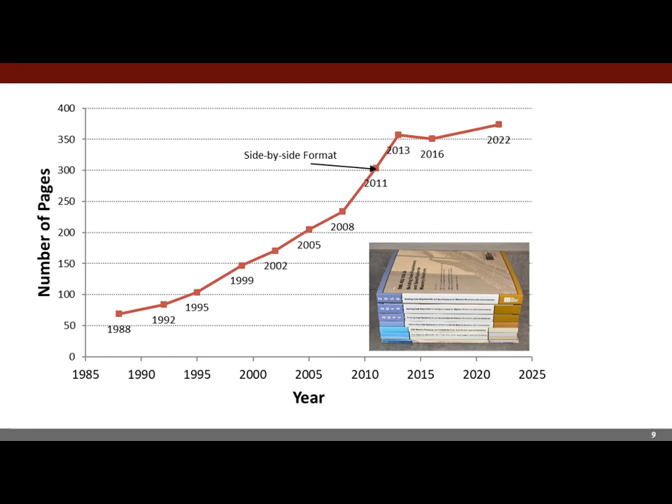I know you really haven't adopted the 2022, but there are some things that we can actually apply now, so we'll look at that and what's coming. We did, unfortunately, increase pages a little bit, but at least the slope's pretty small there, not too bad.

3 things to know, and you've sort of covered 2 of them already. So I'll talk about tension and compression controlled sections and strength design. I forget how many years ago, but I did a talk comparing strength design and allowable stress. I'll admit it, I'm a strength design sort of fan for a variety of reasons.

The veneer chapter is completely rewritten, so I'm going to talk very little about that. Next week, Tina Subasic is here to talk about the veneer chapter. There are some things that will interest architects, changes in the veneer chapter, and things that will interest engineers. I'll just touch on it briefly, but Tina will cover that much better than I could next week.

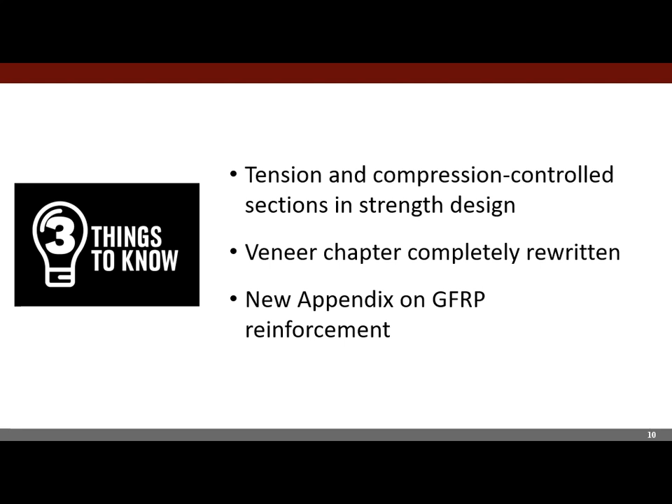And then we also had an appendix on GFRP, glass fiber reinforced polymer reinforcement. I know, was it October sometime, John Myers talked on that, so I won't really do much on that there. But those are some of the big changes here.

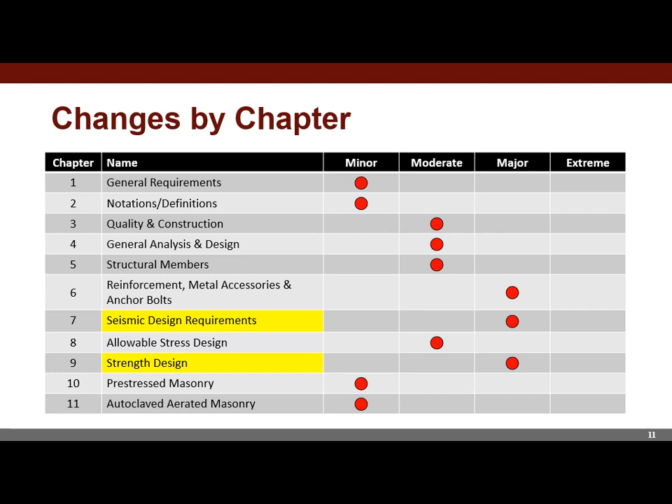Here's sort of changes by chapter, so I'm going to focus on the major changes that we have and highlight a few of those. We'll look at some related to reinforcement, some seismic design things, and a big one in strength design here.

The veneer chapter was completely rewritten. Empirical masonry was deleted, that's Appendix A. We moved the masonry infill out of an appendix, and then we added the appendix on glass fiber reinforced polymer reinforcement.

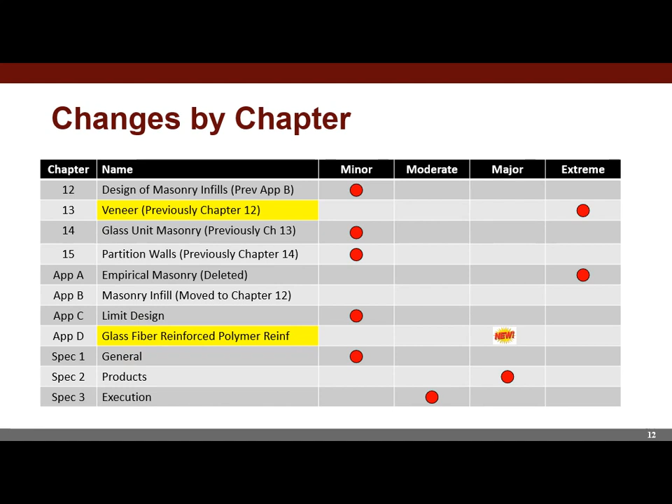So that's a big picture overview of some of the major changes in 2022. I'll just pick some out as we go along, and I'm actually happy to start with this one in Chapter 4.

Chapter 4 is general analysis and design, and we added in this table and figure on shear area. I really want you to hear the background on this: the Masonry Society gets questions from engineers, and then they parse the questions out to various people. I get a lot of the ones related to codes.

There were a couple questions where practicing engineers were just confused over shear area. It really wasn't defined very well, what they use for beams and stuff. So I said, well, if there's confusion, we need to figure this out. A picture's worth 1,000 words, so I developed this and worked with a couple of the structural engineers that sent in questions, got some review and feedback, and modified a few things. This is what we ended up with.

That hopefully clarifies some things there. I'll talk a little about the table, but the big point I want to make is I'm a strange person, I enjoy code, so give me your questions. If you're confused on things, ask questions. We will work to try to answer them. Maybe not until the next edition since it takes time, but do let us know your questions, things that are confusing. At least some of us on the code committee really want to work on that. So this is the result of questions and a review by several practicing engineers.

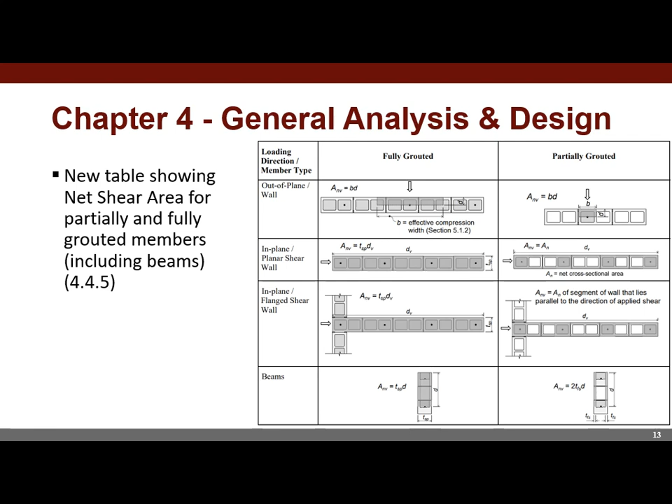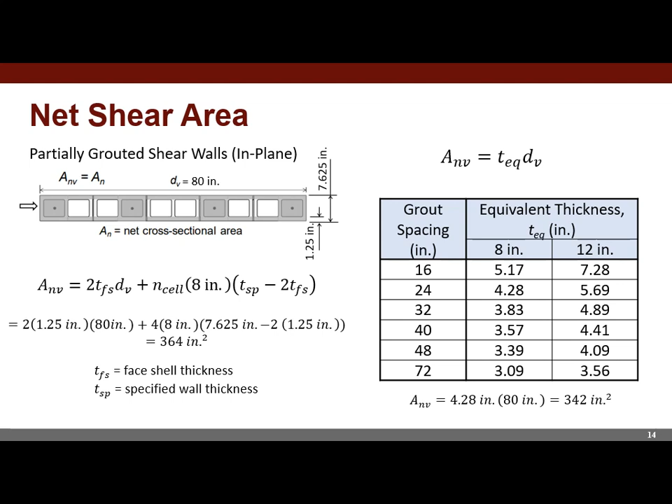Hopefully it's helpful. A couple things to point out: the net shear area. There's confusion on this. For a partially grouted wall, the in-plane area is the net mortar area, so usually just face shell bedding plus the area of the grouted cells, the darker gray area shown. So the face shell and the grouted cells. You can actually calculate it directly, or you can work off an equivalent thickness based on how much grouting you have to get the shear area. So we tried to clarify that.

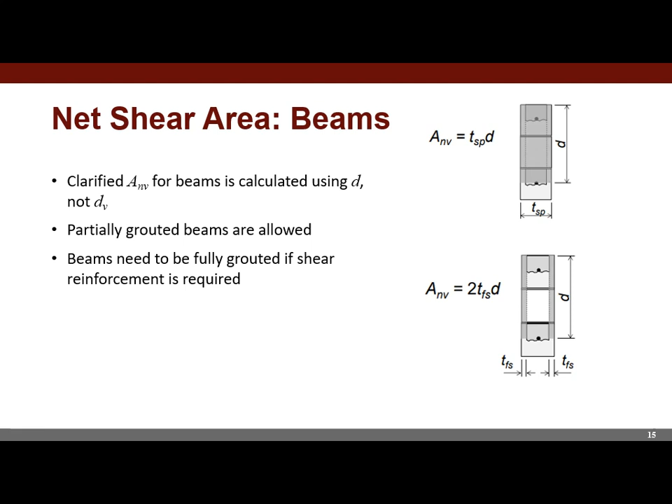Then the big one was the shear area for beams. Although we use the full length of the shear wall to get the shear area, for beams, as with concrete, we go to D, the depth of the reinforcement. We had some discussion about partially grouted beams, and we do allow that now. For the top and bottom course, this is probably not the best picture — if you're grouting the top and bottom course, you'd probably just fully grout it. But for a deeper beam, maybe you just grout a bond beam right over the opening and another bond beam a couple courses up, and the shear area we're taking conservatively is just the face shell area there. So we have a table for that.

Moving to Chapter 6, which is reinforcement: deformed bar size consistency, the size of reinforcement in grout, and then hooks. We'll focus on the first two, and there were a few other things, but we'll focus on the bold items we have there.

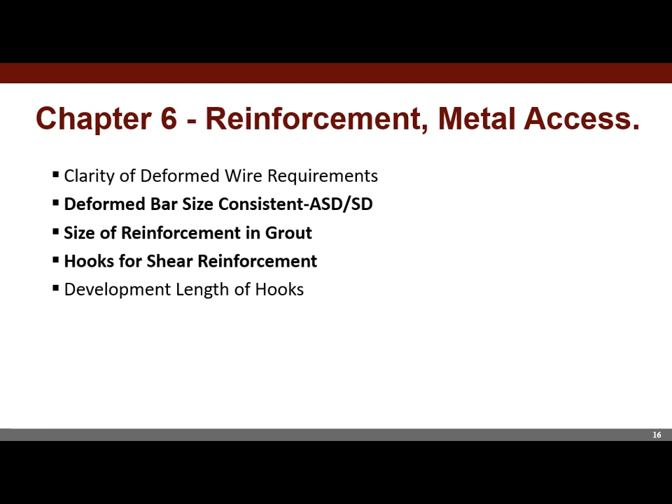Remember, masonry has allowable stress design and strength design, and there were differences in the prescriptive reinforcement provisions between ASD and SD — like 6% for ASD and 4% for strength, but measuring different areas, which was just sort of goofy. So we harmonized those into four requirements. It used to be a maximum bar size of number 9 in strength and number 11 in ASD. Now it's number 11 — that's rare, really rare. Usually we're at 4s, 5s, and 6s, but perhaps for a column or something.

We had harmonized this in 2016 too, so the maximum bar size is 1/8 the nominal wall thickness — so for an 8-inch wall, the maximum you can put in is a number 8, which is still pretty heavy reinforcing. We had some other goofy requirements, so now we have two criteria: it has to be 1/3 the least dimension of the gross grout space, or 4% of the gross grout space is the maximum reinforcing.

Now, what is the gross grout space? Sort of a strange name, huh?

And people have made some funny jokes about it, but we'll let that go.

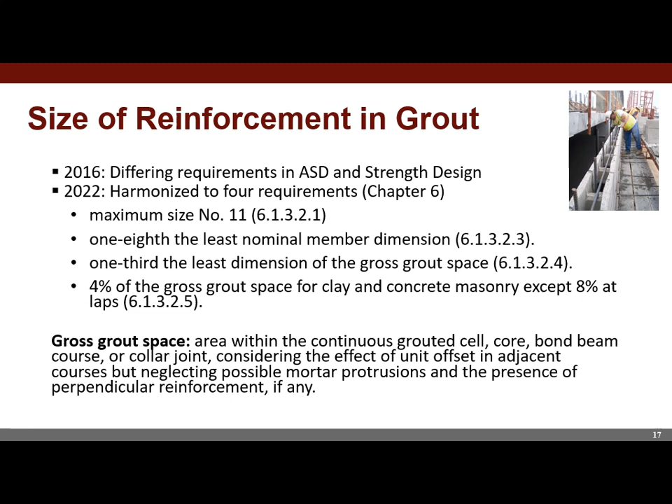So the gross grout space, you read the definition, and I somewhat facetiously say this is amazing code language, because it does actually say what it needs to say, and you can't understand it. So what is it? We have a picture for you in the commentary. The gross grout space is if you stand on top of the wall and look straight down, it's the clear space you can see as you look down into a cell. It accounts for the offset of running bond and the units, but it's what you see when you look straight down, the clear space there. We're not considering protrusions or horizontal bars, just the area you have when you look down.

So it depends a little bit on the unit type, whether you have running bond or not. Personal opinion, we may have dialed it a little tight, but it is what it is.

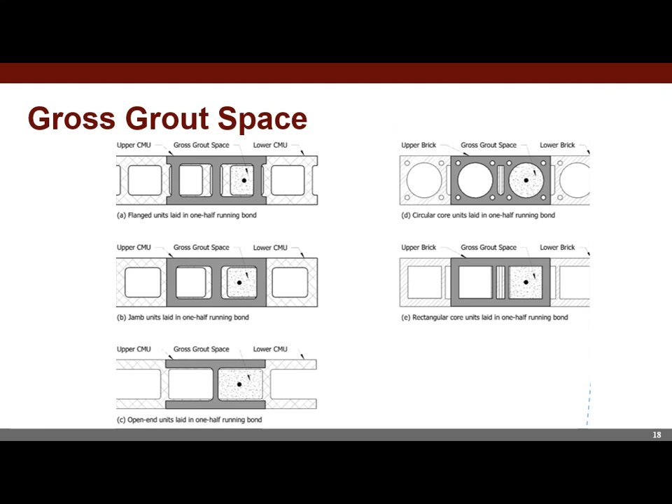Now the next thing tells you what it is, and then we have these tables here in the commentary. Just the fun of code writing—7 numbers there, 7 levels of numbering to get to the table. But this works out for standard units.

So out of all these tables, we'll just focus on one number here: flanged units, that's the flange unit you have up there. Actually, we don't use those in Knoxville. I'm not sure about here, but we'll just take flange units, that's the most conservative. 8-inch wall, here's the number to focus on.

So we meet those gross grout space requirements with a number 7 bar, that's the maximum—again, probably more than we usually use—or 2 number 5s. So I can put that in my cell and I've met those gross grout space requirements.

If you need bigger, which is rare, you could then specify jamb units and have that as part of your specifications. But really the number I would focus on is this one right here. I'm just saying 8-inch; you can look at other thicknesses, but that is really the limit.

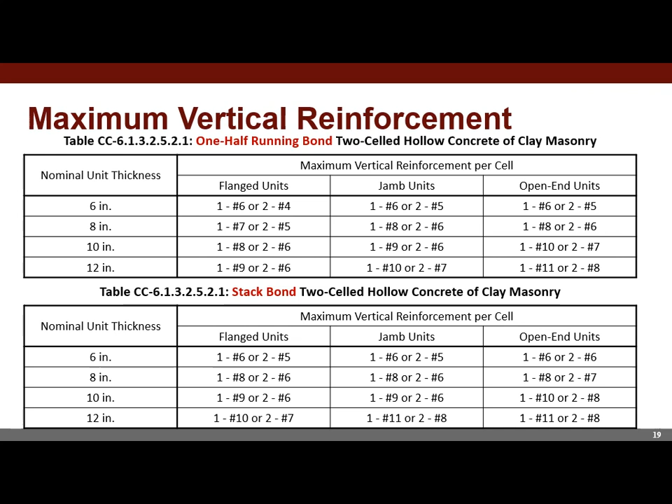So I think we've harmonized it, and hopefully, even though the wording is sort of goofy, this table just tells you what you can do. Really the idea is just to not have it so tight that you can't get the grout in there. Now, hooks for shear reinforcement.

We had in Chapter 6 that if you had horizontal shear reinforcement, which is not real common—usually the masonry can carry all the shear, but sometimes you need horizontal shear reinforcement—you had to have either a 180-degree hook at the end of a wall, or a 90-degree hook if there's an intersection. This is goofy: you had to do that if designing by Chapter 9, strength design, but you did not have to do that if designing by Chapter 8, allowable stress design.

And the technical reason is politics. When it was moved from Chapter 9 into Chapter 6, the ASD people said, we don't want it. Turns out ASD was right.

So actually in 2022—there's nothing there, blue sky—we got rid of the hook requirement. They're going to rear their ugly head again when we get to special reinforced shear walls, but right now it's gone, it's out of Chapter 6, none of that.

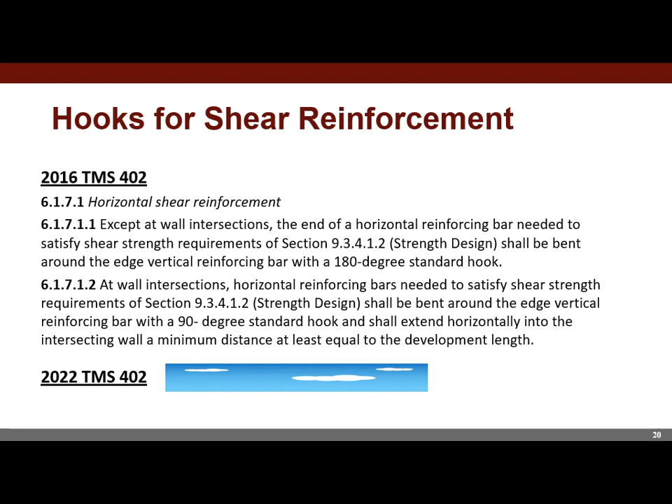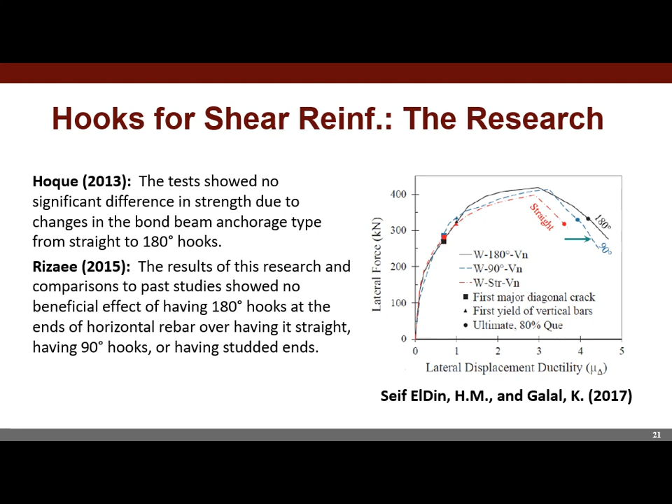The reason was that research actually showed that whether it's a 180-degree hook, a 90-degree hook with the extension going into the cell, or a studded end—nothing special—it basically had the same shear strength. So hooks are gone for shear reinforcement, but we'll get back to it with special reinforced shear walls.

And we did actually clarify development lengths for hooks—not a real major change that we had there.

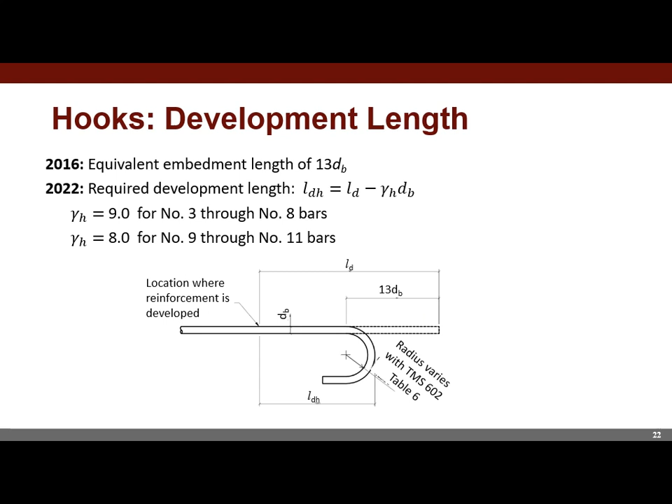So that's Chapter 6. Chapter 7 is seismic design requirements. The three I'll focus on are shear capacity design, hooks, and special reinforced shear walls—I told you they'd rear their ugly head again—and then non-participating elements. In seismic design category D, special reinforced shear walls are required, and one of the requirements for special reinforced shear walls is shear capacity design. So for special reinforced shear walls, we're designing for R equals 5.

We get to reduce our forces by dividing by 5. Why do we get to do that? Well, it's ductility, we have energy absorption. And the way we absorb energy is essentially a plastic hinging, a flexural yielding of the wall. We don't want a brittle shear failure before we get the hinging and yielding, so that's the whole idea behind shear capacity design.

There's a couple changes I'll mention. First, everywhere else in the code we'd deal with allowable stress design first and then strength design. The order was reversed here, so we just reversed the order.

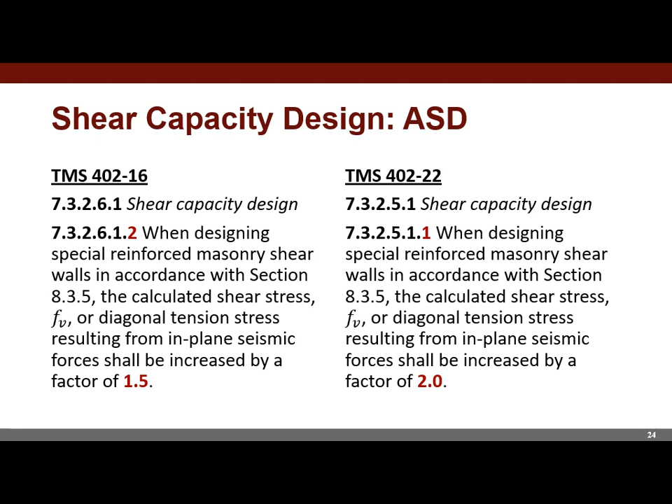So in 2016, we cut the allowable masonry shear stress in half for special reinforced shear walls. It was a half for all the other walls, and then a half of that, a fourth of that, and that's gone now. There's, again, sort of politics. The 1.5 was a historical number that had been around since, I don't know, came down with the Ten Commandments to Moses on the stone tablets or something.

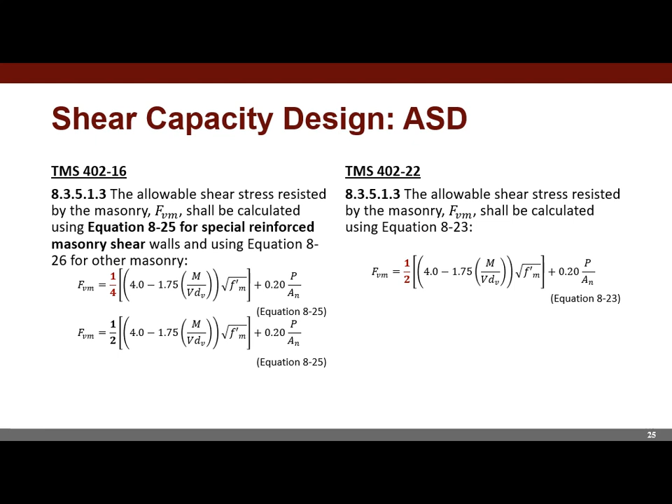When we recalibrated in 2011, our allowable stresses, there would have been big pushback if we didn't keep the historical 1.5. So to match strength design, we went with this quarter. It really didn't do a very good job of that, so finally we just said forget it, got rid of the 1/4, but we're doubling the forces. Actually, the net is for most walls there'll be a little bit less shear you're designing for out of that.

And then for strength design, again we moved now strength from 1 to 2. But we had the design strength. Design strength is the strength reduction factor times the nominal strength. It's more than a value, the shear corresponding to 1.25 times the nominal moment. And then we had the nominal shear strength, which is without the strength reduction factor. That was confusing - why do you do design strength once and nominal strength here?

So we changed that, so it's design in both cases. But 0.8 times 2.5 is 2, so the provision has not changed, but hopefully it's a little bit clearer that we're using design shear strength in both places.

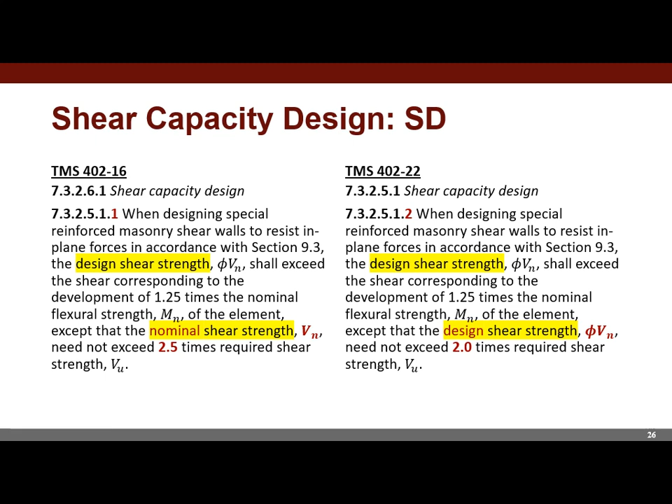Now our hooks. In 2016, shear reinforcement shall be anchored around vertical reinforcing bars with a standard hook. I don't know how many hours of my life I've lost hearing arguments on two things with this provision. Is shear reinforcement all horizontal reinforcement, prescriptive reinforcement that you have to have in a special reinforced shear wall? Or does it mean just the reinforcement required to resist shear? So if the masonry has sufficient shear strength, you don't have to worry about this. There's very, very strong arguments on both sides of that.

And then standard hook - does a standard hook have to be a 180-degree hook? Can it be a 90-degree hook with the leg going down into the cell? There's very, very strong arguments on both sides of that too.

So we did actually end up changing it. We got rid of this, and we're clarifying when hooks are required. Essentially, when V over A sub nv, F sub vm for ASD, or V sub U over that - whether you're doing allowable stress or strength design - when the demand is 40% or less than the capacity, you don't have to put in hooks. When it's 40% or greater, you do have to use hooks.

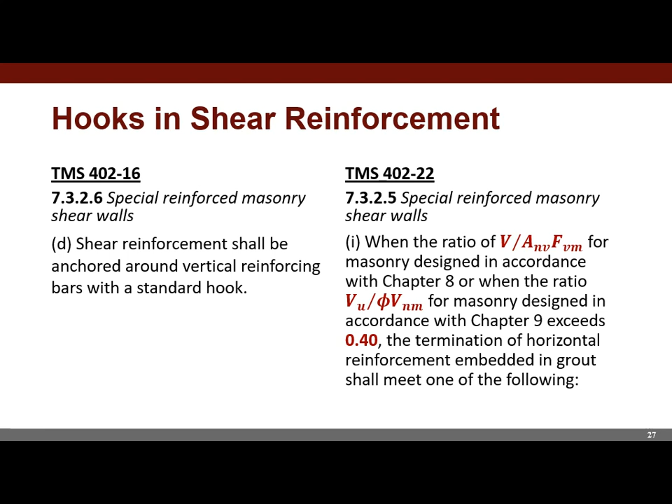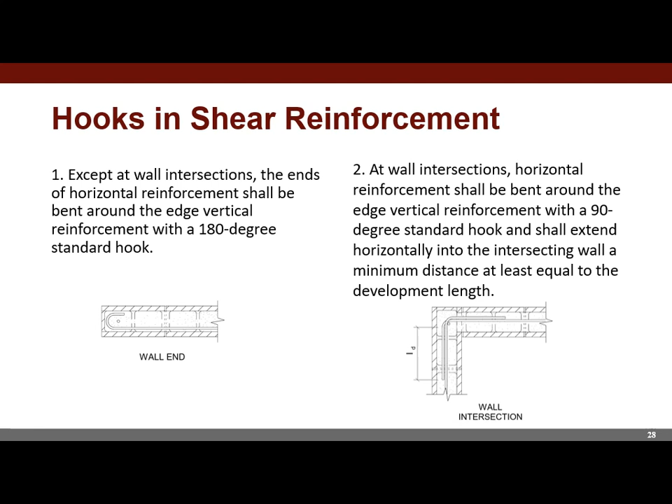Anyhow, got enough going on. We ended up with 40%. I was ecstatic about that. A few people in California were really mad, so I was considering it a win-win. Got hooks out of a lot of walls, and I got some people from California mad. So it was a good day for that. Anyhow, so that's what we have there.

We did clarify for non-participating elements. It said that non-participating masonry elements, like a partition wall, required prescriptive reinforcement to be either horizontal or vertical. Really the intent was for it to be in the direction of the loading. Most partition walls span vertically, not all, but most, and putting in horizontal reinforcement really doesn't do anything for you if it's spanning vertically. So we've clarified that it has to be in the direction of the span.

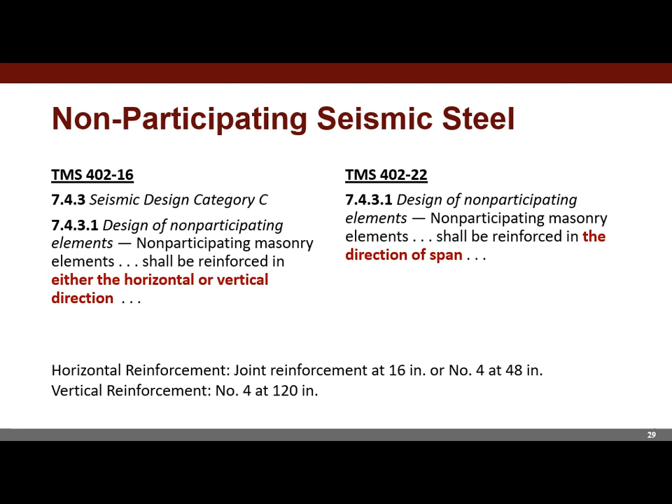Now it's pretty light reinforcing there. A number 4 bar at 10 feet, so it's not huge reinforcing that you need. If you're in seismic design category C, you have to do it, but actually take advantage of that. There are 2 ways you can really design partition walls. You could design it as unreinforced and just throw a bar in every 10 feet. But if you're going to have to put the bar in every 10 feet anyway, actually take advantage of it—that'll help you and get you more strength than using unreinforced.

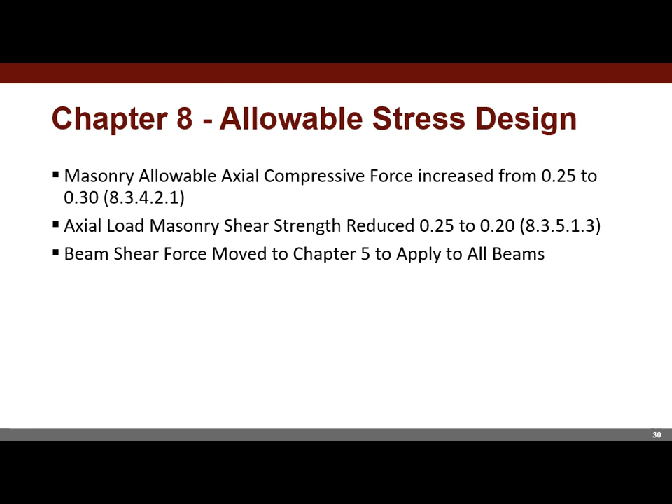All right, chapter 8, allowable stress design. We had a few changes there. We changed the maximum—this was 0.25, and calibrating with strength, we increased that to 0.3. You're rarely up there anyhow, so it really doesn't matter.

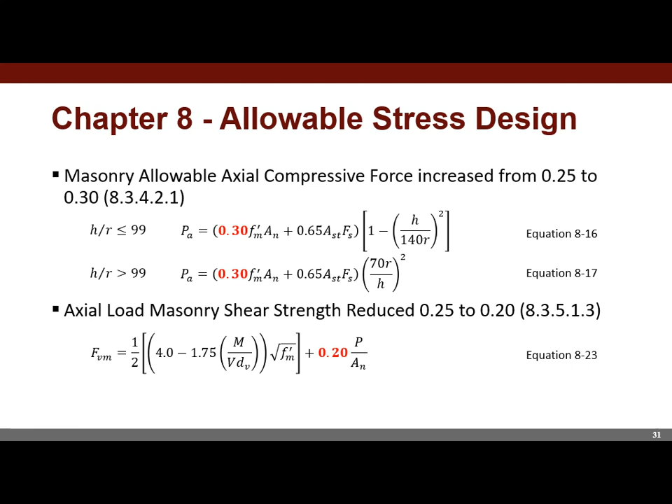We did talk about masonry shear strength. That was 0.25, and it was changed to 0.2. That's really a load combination issue—in allowable stress design you have 0.6 wind or 0.7 earthquake, so you can't really make it work as such. ASCE 7 actually last cycle had 2 ballots to change the ASD load combinations to the strength combinations divided by 1.5. Both ballots failed; it's still being discussed. I don't know what's going to happen in 7-28, but probably somehow the ASD will change. But anyhow, that's sort of a load combination issue there.

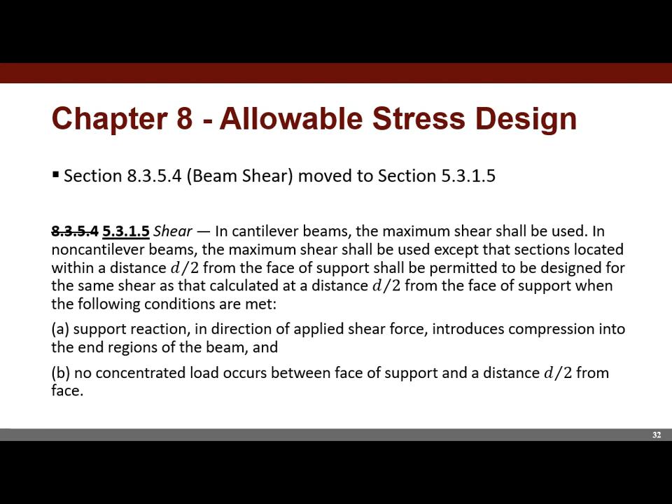In chapter 8, we said about shear for a beam you could look at D over 2 from the face of the support. Technically that didn't apply to strength design, but we moved that to chapter 5.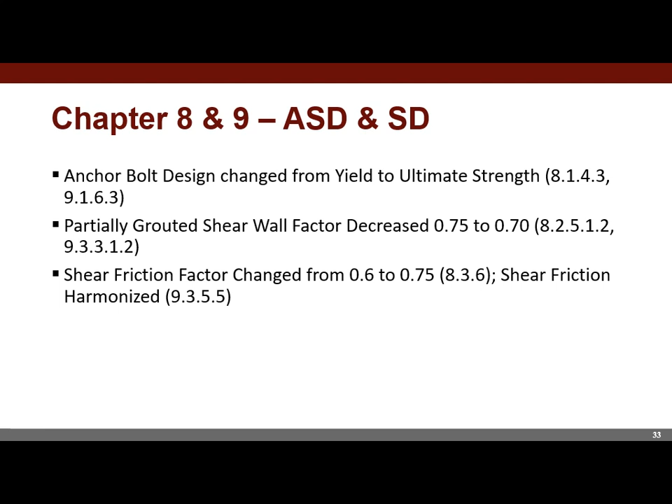Then some things happened in both chapter 8 and 9, allowable stress and strength design. One is anchor bolts—2 truths and a lie, if you've played that game. Actually, I have 1 truth and a lie here. So the commentary to chapter 9, or maybe I should back up, our anchor bolt strength was based on Fy.

In AISC and ACI, the strength of steel is basically based on Fu. There's not a real good well-defined yield strength for something like A307. So our commentary said use a yield strength of 37, and it will basically match AISC.

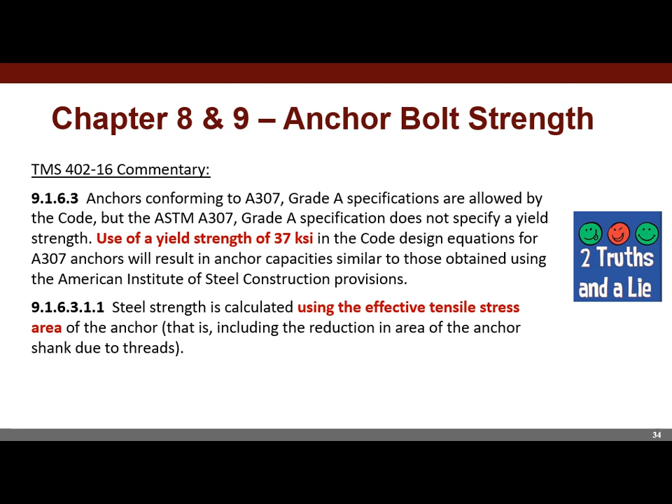A couple of sections down, it said use the effective tensile area, not the gross area of the bolt or the unthreaded portion, but the threaded portion. One of those is a lie. If you use the threaded portion at 37 KSI, you get about 75% of the strength of AISC. So one of those is a lie.

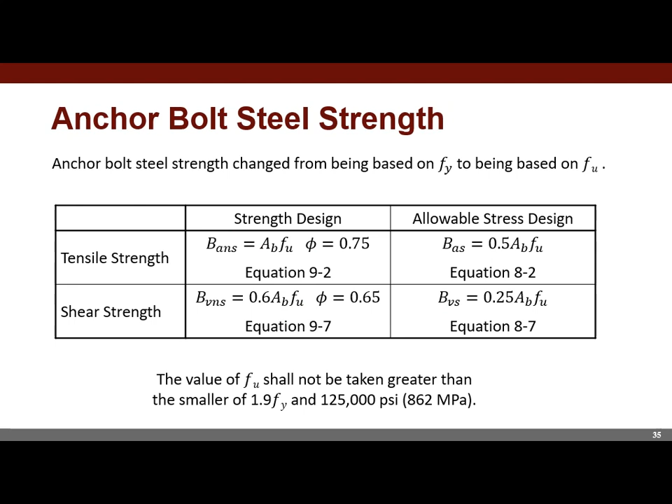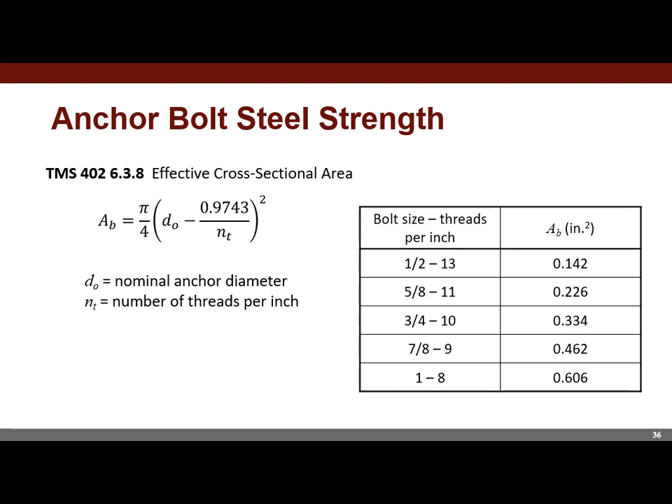You choose which. But we did change the F sub U based on that. So now for anchor bolts, the steel tension or shear strength is the same whether you use AISC, ACI 318, or TMS 402. That makes sense. So we did change that, and we do use the effective cross-sectional area. We have a little table there for common anchor bolt sizes used in masonry.

Reinforced masonry shear strength: in 2011, I believe, we introduced gamma sub G, the partially grouted shear wall factor. When we looked at it back then, we examined about 8 different ways of calculating the shear strength of a masonry wall, and probably by pure luck, strength design did the best. It beat Canada, beat Australia, beat New Zealand, beat Priestley's equation. It was good.

So we actually changed it in 2011. ASD now basically mirrors strength design for in-plane shear strength. We divide by the area to put it in terms of stress and use a factor of safety of 2. It worked really well for fully grouted walls.

It turned out that the strength design equations for fully grouted walls were about 14% conservative, roughly. That's some work that Dave McLean at Washington State, one of his students, did. In other words, if I built a fully grouted shear wall, took it to the lab, and tested it, the strength on average would be about 14% greater than what we predicted. There's a lot of scatter on that, though.

Now, partially grouted was not so, and we were going 'skies falling' and so forth. There was some work done at Drexel showing that for partially grouted shear walls, we were over-predicting. We only predicted the capacity was about 90% of what we were predicting. In other words, if we tested a partially grouted shear wall in the lab, it would only test on average about 90% of what we predicted.

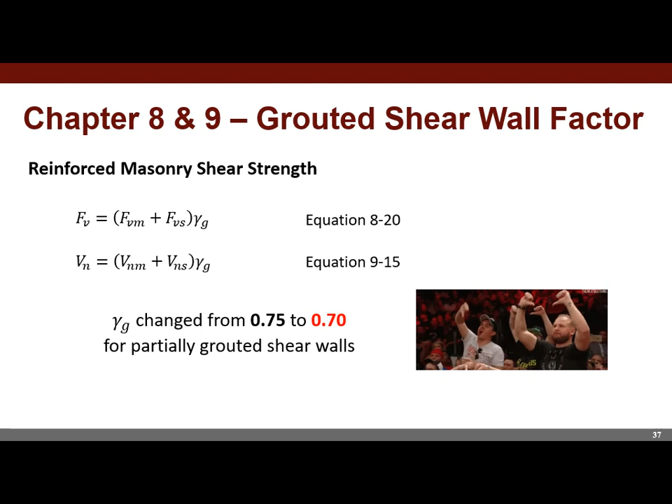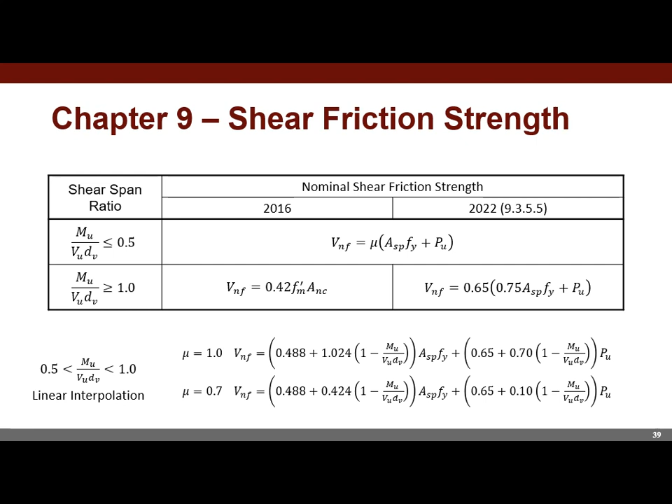But we have one that actually increases strength: for shear friction strength, that 0.6 increased to 0.75. So the crowd is going wild here - we actually have something that increases the strength a little bit. We changed for strength design the shear friction strength. We had a formula that was not too bad to calculate, but a hard thing to calculate this area, so we made it a little bit easier.

I'll cover tension, compression, controlled sections a little bit later. Just a few things on Chapter 9 and a few other chapters.

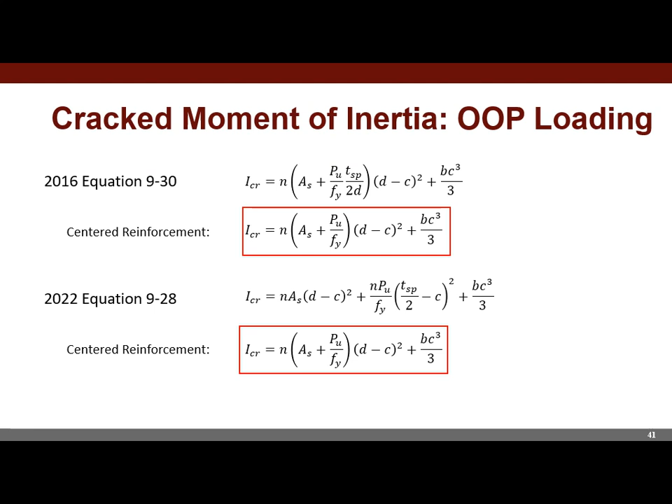We did change, if you do an out-of-plane slender wall in strength design, you have to use cracked moment of inertia. That T sub SP over 2D was a modification for non-centered reinforcement, empirical. One of our members derived this equation, sort of mechanics based for non-centered reinforcing. So even though the equations look different for centered reinforcement, they actually reduce to the same equation.

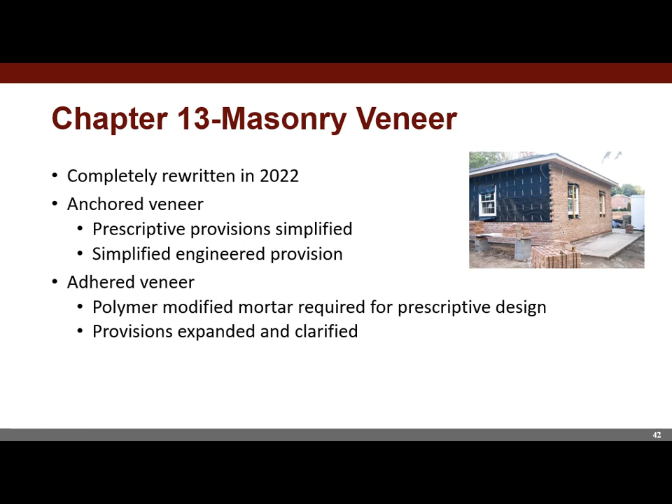Masonry veneers, I said you'll get a great talk on that next week. We completely rewrote the chapter.

Just to whet your appetite, I think we made it a little simpler in how you do design. You can use the 2022 provisions, even though you're still on 2016. If you go to this, essentially the alternative design of anchored masonry veneers, that actually is a path you can use 2022 now in that.

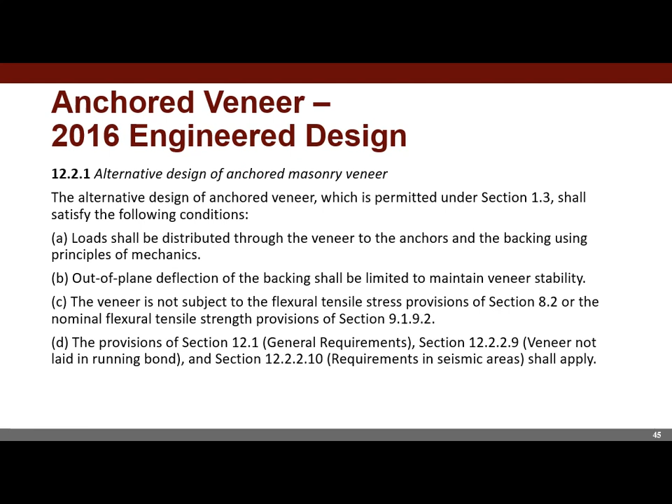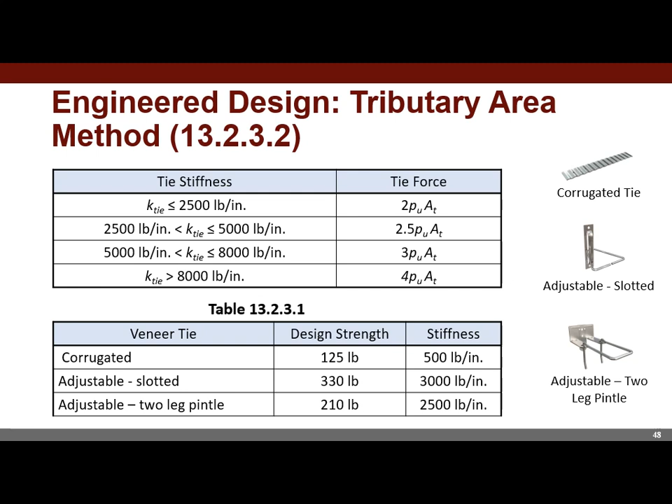So there's some things related to stability of backing. We have a table. We said you had to consider that, but didn't tell you how, so we got a simple table. We also came up with an engineered design method for veneer ties that can save you quite a bit over a prescriptive design, reduce your ties there.

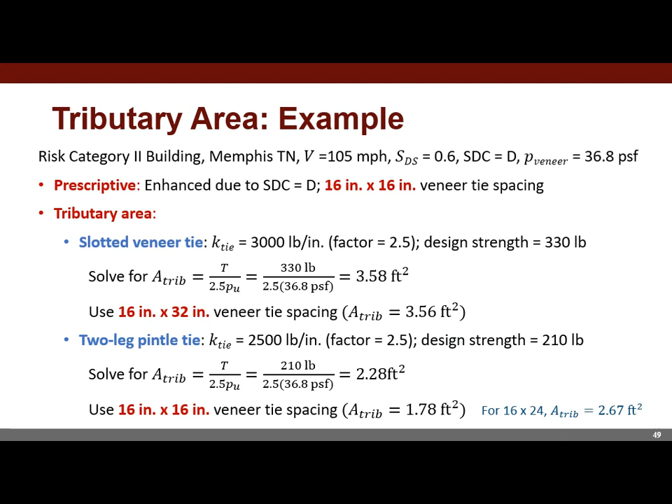Again, I'm not going to spend time, but here's Memphis, Tennessee, an example where using the engineered approach I was actually able to cut the number of veneer ties in half. There's also a modeling approach that we have and describe.

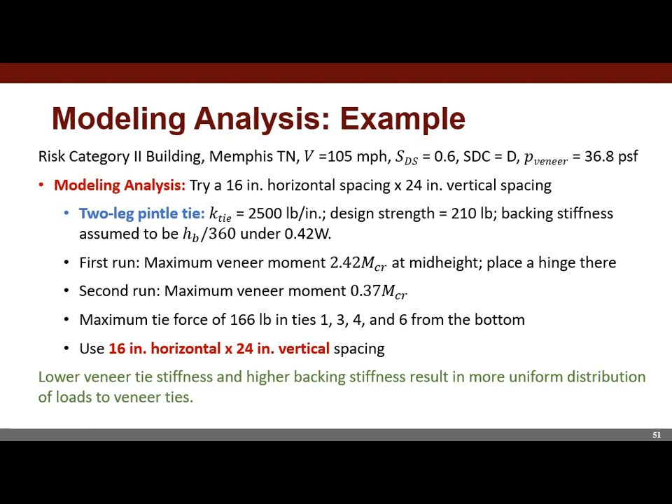So I go through that. I know I went through it real fast, but hopefully it whets the appetite a little bit, and come back next week and hear Tina talk about this. There's also some architectural features that we added in there that I think will help a lot. And we did add the GFRP, and of course John Myers was here.

A few things in 602, the spec, that changed. We did add periodic inspection for anchored and adhered veneer when the height of the veneer is 60 feet or more above the grade plane.

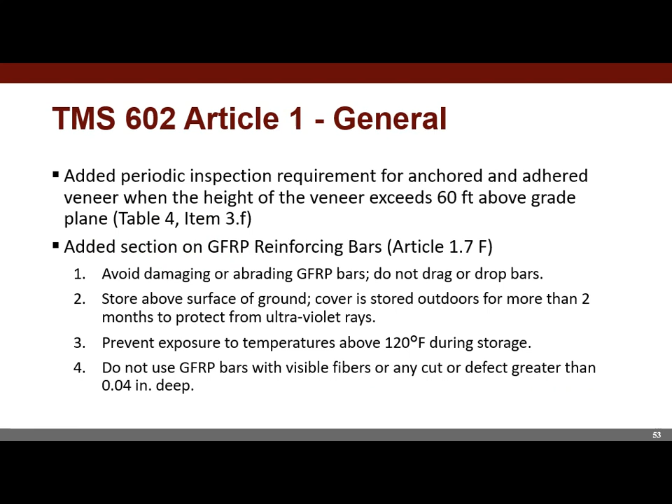We did, of course, add things on GFRP. We added in pre-blended mortars, C1714. It really was in there, 1714 references C270, but just to be clear. So the pre-blended, you know, you get the sack. A lot of, at least around Knoxville, a lot of people are using it with a silo, you put it in there.

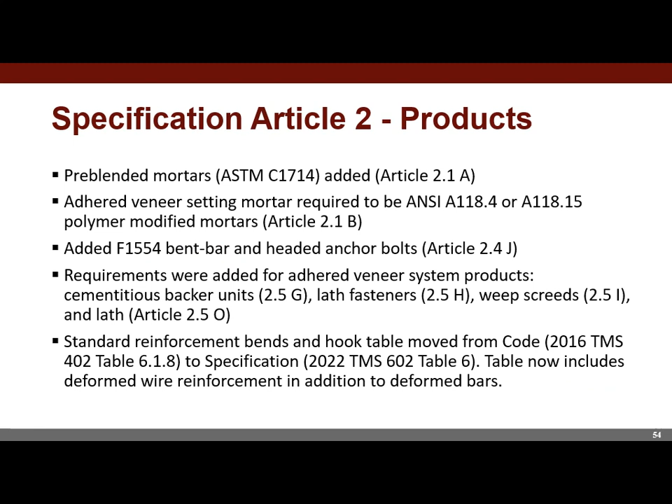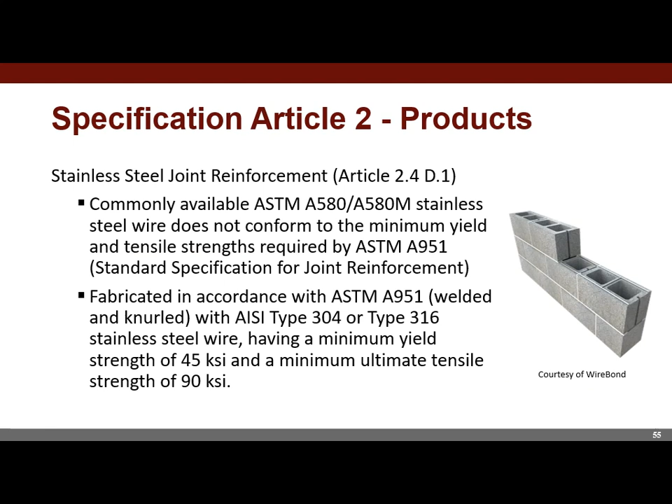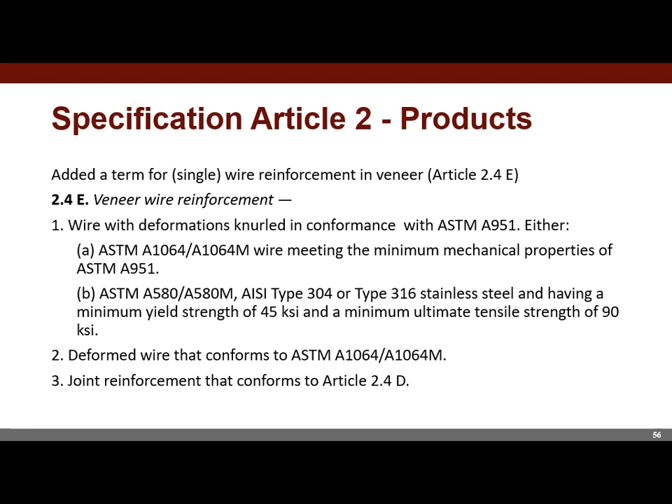So we also added in F1554 for anchor bolts, some other things in there. We clarified some things on stainless steel joint reinforcement. Stainless steel is really interesting in that the yield strength is half or less of the ultimate strength for a lot of stainless steels, so it's sort of an interesting animal to deal with. We did some things on wire reinforcement, just clarified some terminology, and a few other clarifications, tolerance for veneer tie placement, and that.

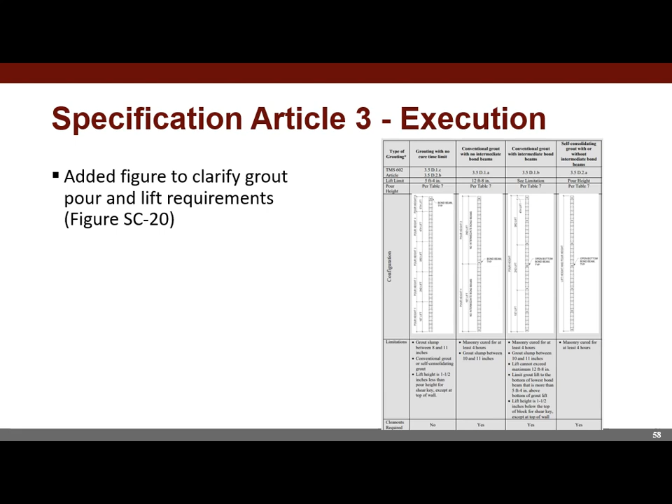I know you can't read it there. And we will be referenced, or I should say, it's out, we are referenced in that.

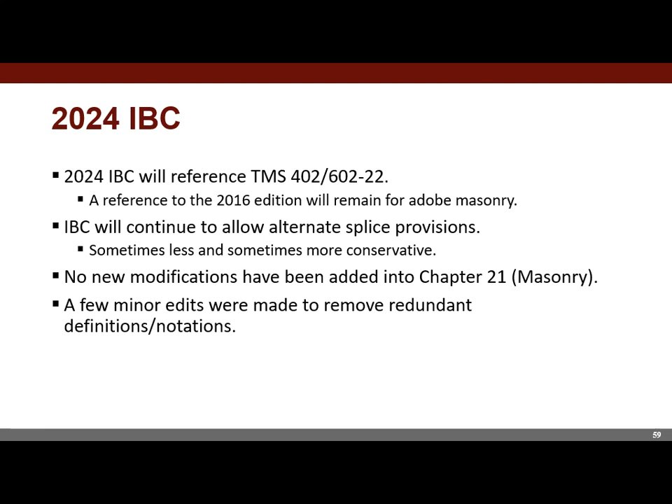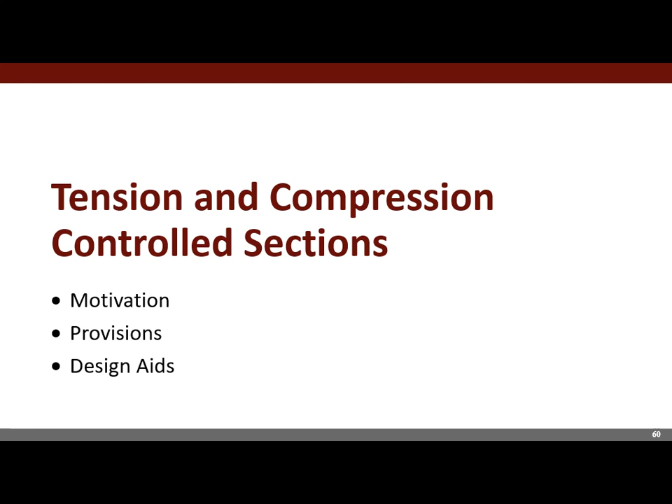All right, we'll spend the last little bit here on tension and compression controlled sections. So I am a fan of strength design for a variety of reasons. It gives more efficient, potential to give more efficient designs than allowable stress. As an educator teaching a masonry class, it's pretty similar to reinforced concrete design, so it's a little easier to teach. In 2016, we had some pretty stringent maximum reinforcement requirements in strength design.

Our strength reduction factor for combined bending and axial load, flexure and axial load, was 0.9, period. Think of ACI 318: it's 0.9 for tension controlled, but then you have your transition region and your compression controlled sections, with a lower strength reduction factor. We didn't have that in masonry, but we had some stringent maximum reinforcing requirements.

We had the strain gradient corresponding to epsilon mu and alpha of 1.5 times the yield strain there. Balanced conditions would be where the steel strain is at yield, so we're less than balanced here. We had this weird load combination where you could include compression reinforcement in calculating maximum reinforcement. Really, those all came about to make it work.

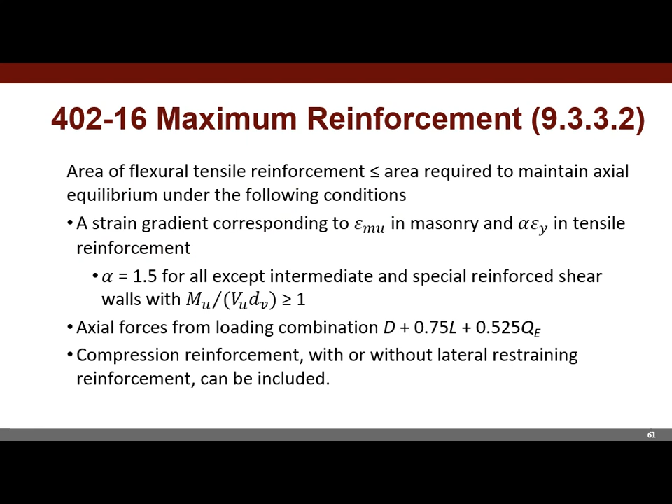When we introduced strength design in 2002, you really couldn't design. The maximum reinforcement provisions were so stringent that if you put in much more than a number 3 bar, you exceeded it. So it wasn't workable. This provision came about so that it could basically work.

Sometimes those provisions are really restrictive. About five years ago, there was a group of 14 of us that got together and spent a week together in a rental house in Canada. There were 7 from Canada and 7 from the US, and we compared the Canadian and US masonry codes.

Bunch of sick people, right? Just spending a week living together, comparing codes. Great time.

We kicked Canada's rear end. It was not close — our designs were so much more efficient than Canadian designs. Jason Thompson, probably most of you know who he is, talked to some of us. We sort of had an epiphany that we had made a bunch of minor changes over the years, sort of enhancing it, and they added up so we could kick Canada's rear end.

Except when we did a structure — an apartment building — and looked at how high you could go, Canada could go higher than we could. It was these maximum reinforcing provisions that were biting us. So we were starting to do something about it; there was motivation, we had to do something here.

So we introduced this tension and compression control. Here's the interaction diagram for a number 5 bar at 8 inches in an 8-inch CMU wall, looking at out-of-plane loading. This is reasonably heavy reinforcement, but certainly something you can have at jambs and piers — not unheard of.

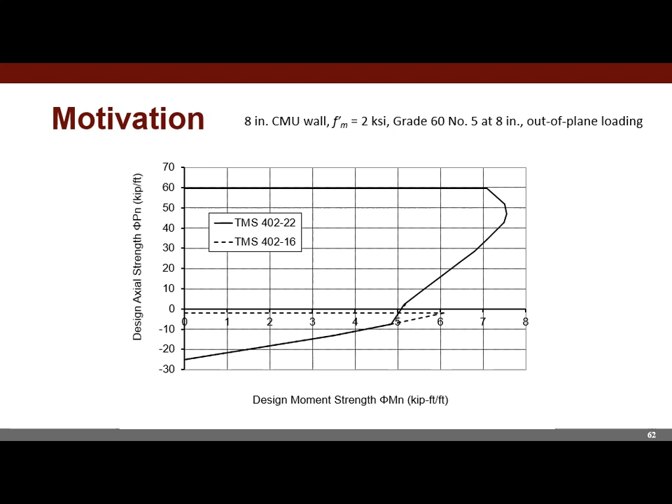So that was sort of the motivation. This solid line is now with the tension and compression controlled sections. You can see we gave up a smidge here, but boy, we gained a ton. There were several other motivations, but this was one of the big ones.

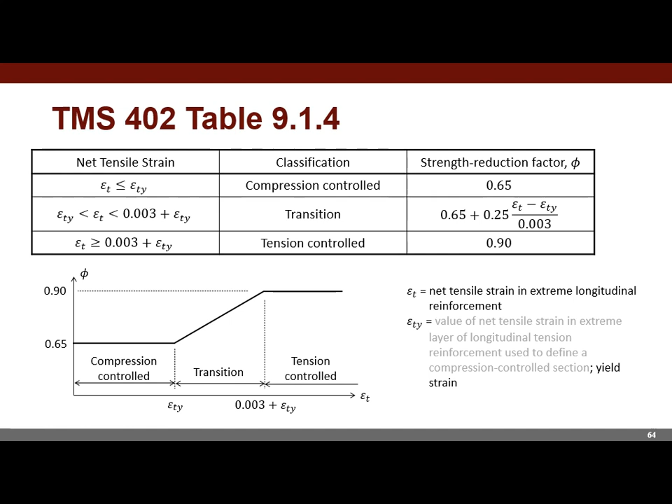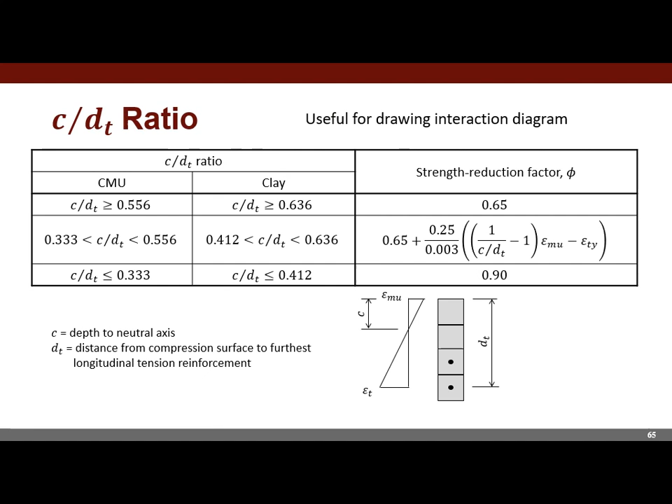Here we have tension, transition, and compression control, just like we have with concrete. If you're doing an interaction diagram, you can also write it in terms of C, the depth of the neutral axis, over D sub T. I use this a lot in spreadsheets to do the interaction diagram.

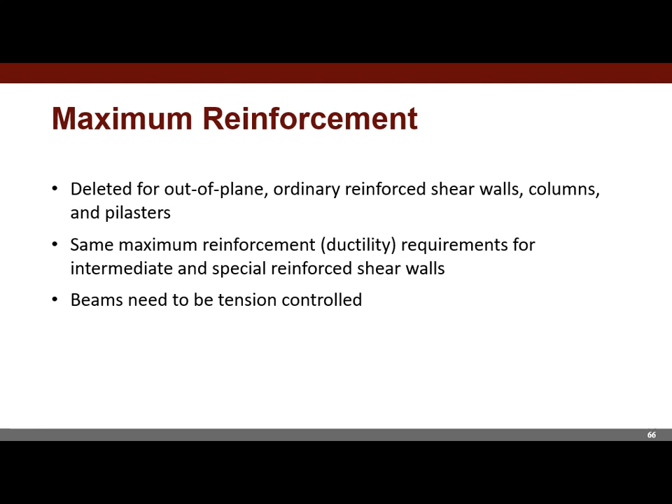As a result, we deleted the maximum reinforcing requirements for out-of-plane loading, for ordinary reinforced shear walls, and for columns and pilasters. We did maintain the maximum reinforcement ductility requirements for intermediate and special walls — I'll look at those a bit and give you a little trick there. And we did say that beams, like ACI, need to be tension controlled, so we'll look at that briefly with beams and lintels.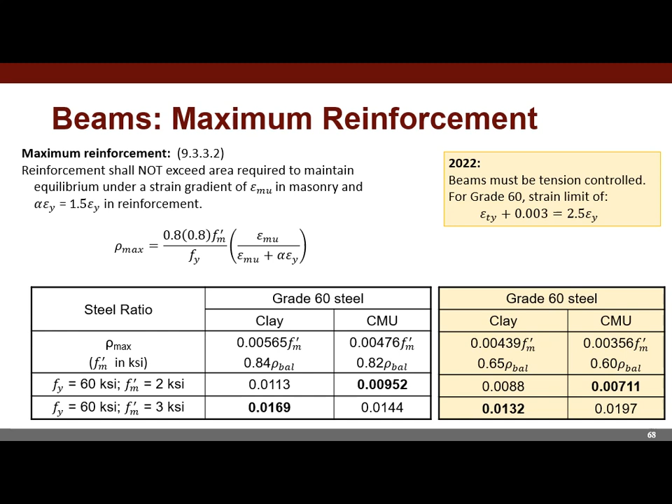For beams, it's actually a little more stringent — there has to be tension control, but these values are easy to meet, so practically speaking there's really no change there. If we look at load-bearing walls, there are some formulas in the commentary showing the maximum load on a load-bearing wall for it to be tension controlled. If you exceed this load, then you're in the transition or compression controlled region. The color coding is mine, so you can argue with that.

Green basically says that you're going to be tension controlled. Look at these loads, 10 kips per foot, 14 kips per foot. Think of a single story, big box structure. Your axial load is what? On the order of a kip per foot-ish. So we're nowhere near this, so we haven't changed most of the design you do out of plane. It's going to be tension controlled, okay? So almost all walls you do it still the same way, tension controlled.

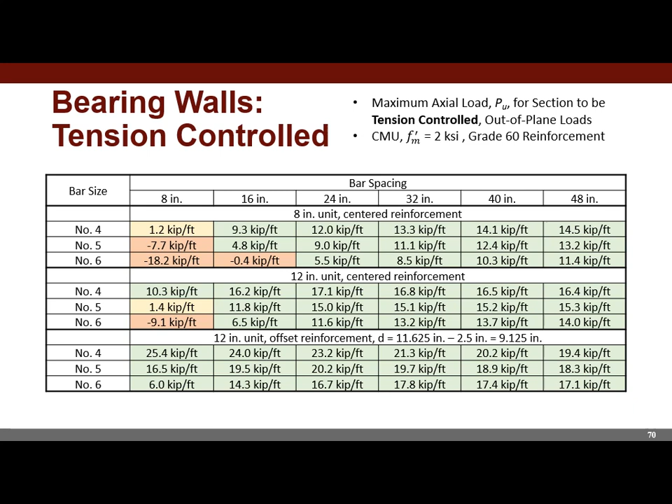The yellow there, the 1.2, 1.4 kips per foot, that's sort of close to where your loads are, so you might get into the transition region, you might not. And then the red, you need pure tension, so you will be in the transition or compression controlled region there. But you can design for that.

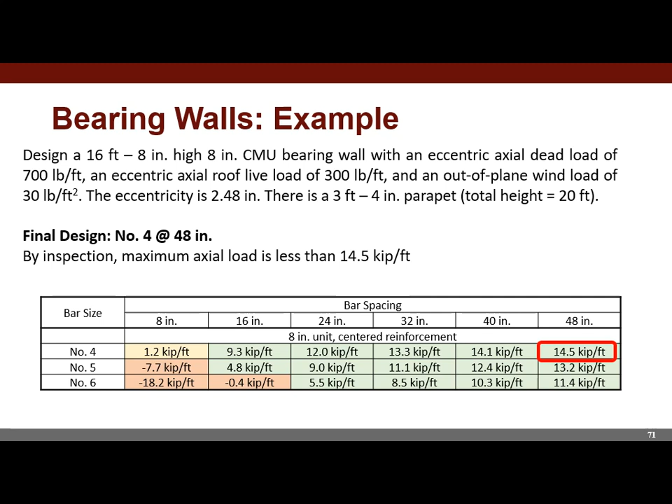So 16-foot, 8-inch high wall, 700 pound per foot dead load, 300 pound per foot live load, roof live load, out of plane wind load of 30 PSF, some generic, roughly typical numbers. You end up with number 4's at 48, and just by looking at that, there's no way any load combination is going to be greater than 14.5 kips per foot axial load. So it's tension controlled. Easy. We're going to come back to that a little bit.

Now we'll skip over this. Now, that funny section I mentioned. So if you draw an interaction diagram for the number 4's at 48 inches, you end up with this goofy little dashed line here, okay? What is happening, and this only happens for partially grouted walls. John Hochwalt, I believe he's spoken here too, proved that this couldn't happen with fully grouted walls. But here's what happens.

As the neutral axis increases, with the partially grouted wall, the neutral axis ends up in that grouted cell. And there's only 1 out of 6 cells that's grouted, so think of it like a T-beam, a pretty narrow web in there. So as that neutral axis increases, you're gaining a little bit of axial load, but not much, because that web's smaller - you're just not gaining a whole lot of area. So the axial load is going up pretty slowly. But we're in that transition region, so as c increases, that strength reduction factor is decreasing - we're going between 0.9 down to 0.65. So essentially the axial load is increasing at a slower rate than phi is decreasing, and you get this funny shape where it goes up and goes back down.

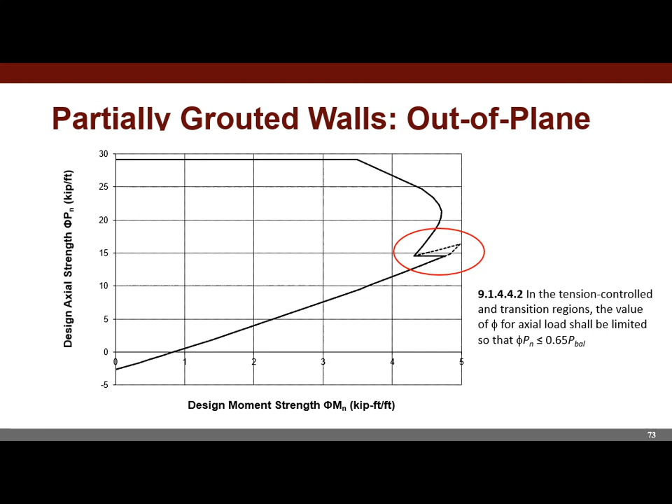That's what it's doing. So go back to that wall I had, that 16-foot, 8-inch high wall. Now we'll put some openings in it, okay? And we have a pier here, a 2-foot pier. So looking at the out-of-plane load and the tributary on that, number 5's at 8 inches is what I need.

So prior to 2022 in 2016 strength design, I'm toast - I can't do anything, I've got to go to ASD. ASD ends up being more conservative than strength design, so this makes zero sense. I say I can't put in the reinforcing because it exceeds my maximum reinforcing requirements, so I'll go to ASD and I'll put in even more reinforcing. Doesn't make any sense at all, but that's where you were at. You didn't have a choice there.

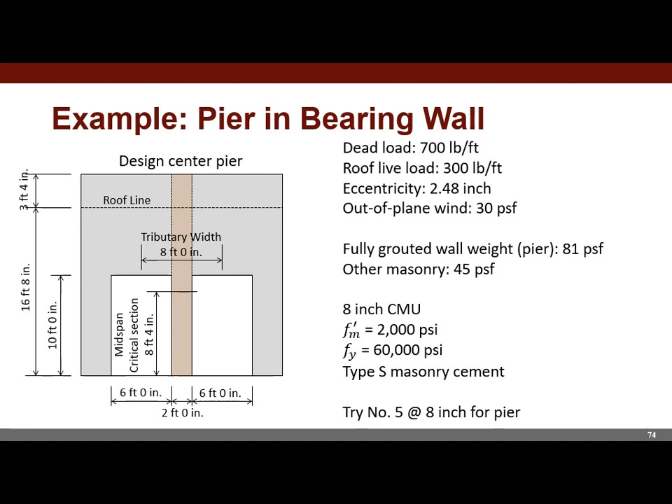And it works. There's my interaction diagram, my load combinations are in there. Number 5's at 8 inches work.

How do you design with tension, with transition and compression control regions? It gets a little messy in that, and whatever you do in concrete works here in a sense.

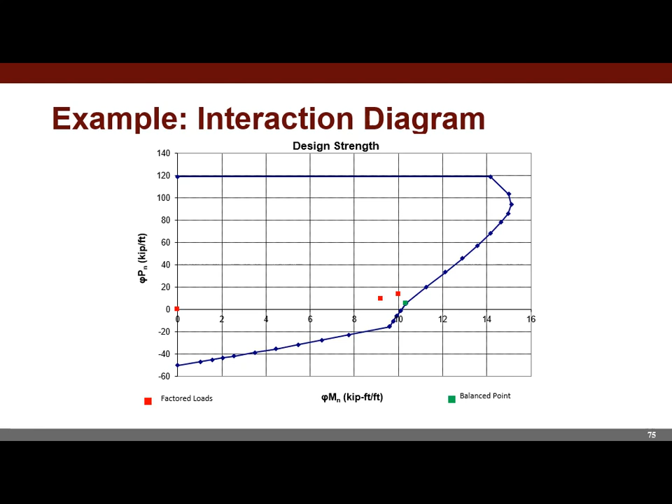But the way I do it is with a spreadsheet and an interaction diagram. If I put my email address up, I'll send it to you. Happy to do that. Just sort of fooling around on a spreadsheet, with the bar spacing, in a few minutes, I'm there. You get it to work there.

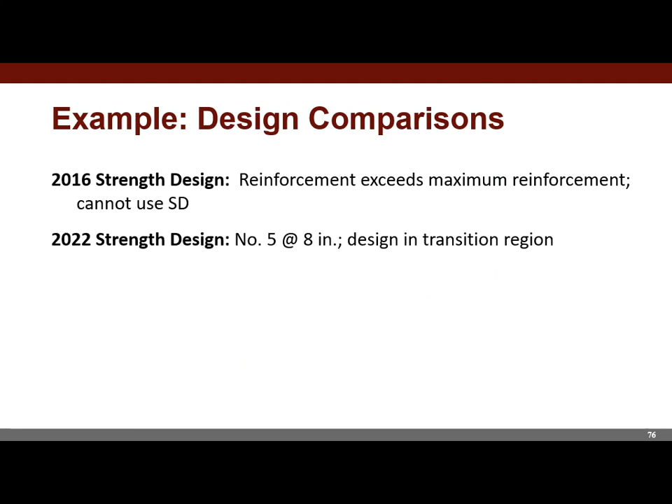So in 2016, we were toast. Now we have number 5's at 8 inches in the transition region. So it works. Just a few minutes on shear walls here.

So I mentioned in 16 we had these stringent maximum reinforcing requirements. Reasonably stringent. That was in 9332 and 936 wall designs for in-plane loads. You either had to meet this, or there was this section on boundary elements, similar to reinforced concrete boundary elements.

The only problem is in masonry, we don't have really enough research and knowledge to have prescriptive requirements for boundary elements. It doesn't say it explicitly like this, but pretty much what it says is if you're going to use boundary elements, you got to test it. Nobody's going to pay to test it in the lab to show you ductility.

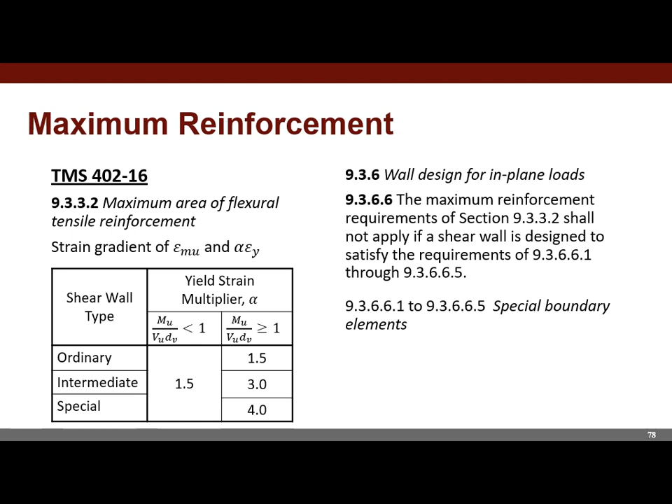But there are some sort of checks, as it were, that if you meet certain requirements, the wall is basically deemed to have sufficient ductility. So that was sort of hidden. It was in 2016, it is in 2016, it's sort of hidden, so we did some rearrangement here.

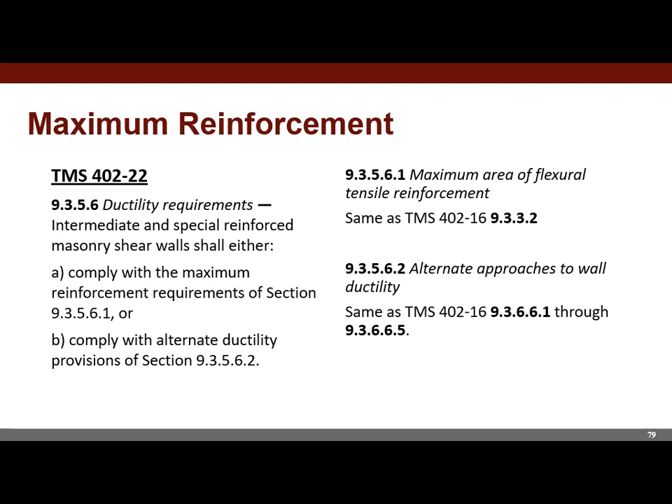So with shear walls, we have a section on ductility requirements, and it only applies to intermediate and special, not ordinary. You either have to comply with the maximum reinforcement requirements of 9.3.5.6.1, which is the same as what we had except the ordinary is gone, or the alternate - we're now calling it alternate approaches to ductility - which is really the same thing, but we hopefully made it a little clearer.

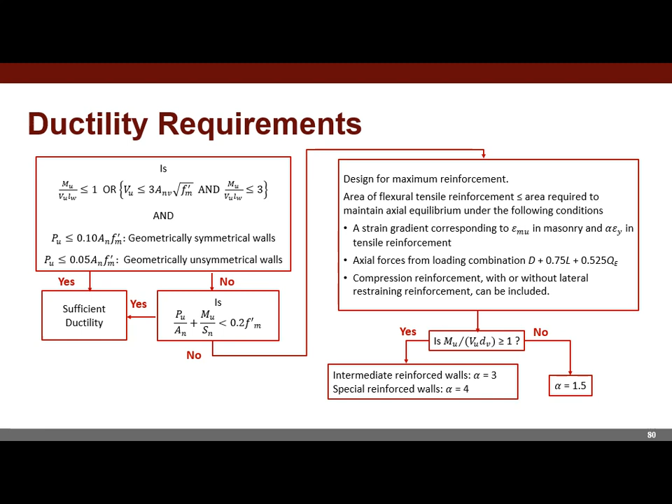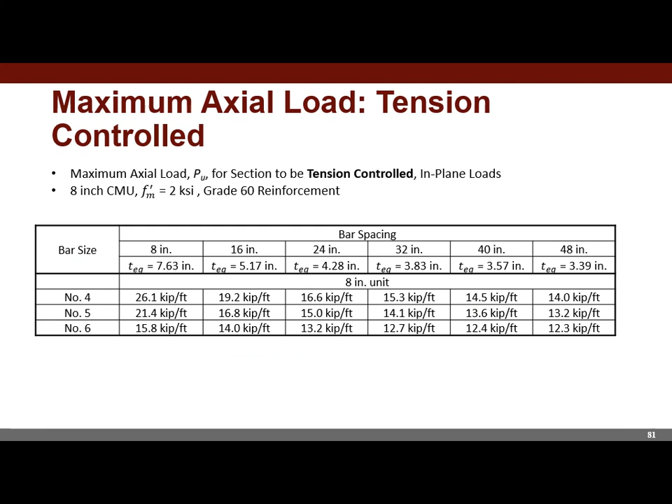So again, this is not a technical change, it's a reformatting change. Hopefully it makes it a little clearer to you that there are these provisions that make it pretty easy for checking ductility of a shear wall. And if you have an ordinary wall, the loads are pretty high before it's not tension controlled. So again, I'll make up a number - 98% of your shear walls, the design won't change. I have no idea what number is correct or not.

All right, whirlwind tour there. Thank you. What questions do you have?